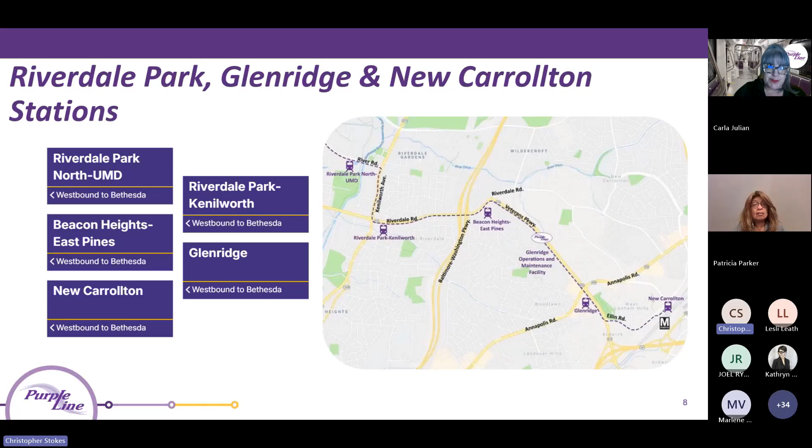And with that, I'm going to turn it over to Ray Biggs to introduce our progress video. Thank you, Carla. We're excited to share our new spring 2026 progress video with you. The Purple Line project evolved and transformed tremendously throughout 2025. And now in 2026, we're seeing Purple Line light rail vehicles in motion along the eastern side of the alignment from New Carrollton to Adelphi Road. Our latest video highlights this incredible progress. This year, we've also included stories that show how the Purple Line is connecting communities across Montgomery County, Prince George's County, and beyond. So let's go ahead and play the video.

I believe that this Purple Line will help businesses. I think that it's going to make people's trips to getting to jobs and to the University of Maryland amazing. It'll be much easier to do shopping, get to the local libraries.

And the Purple Line is going to be like a brand new baby. It's going to be so exciting. I'm thrilled, I'm thrilled, yes. Yeah, we're really looking forward to it.

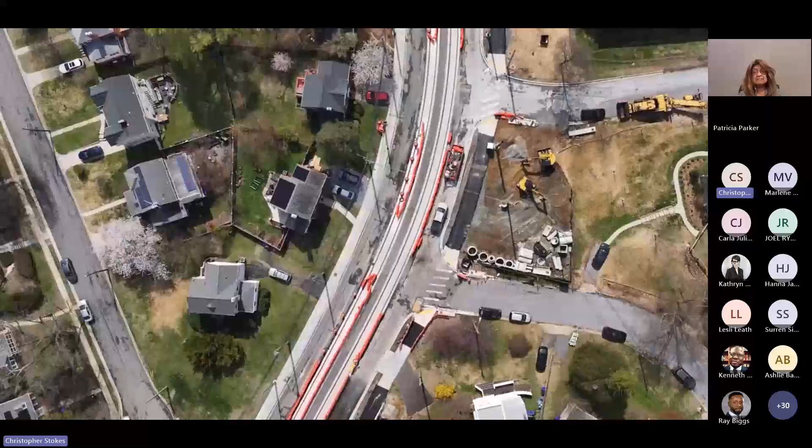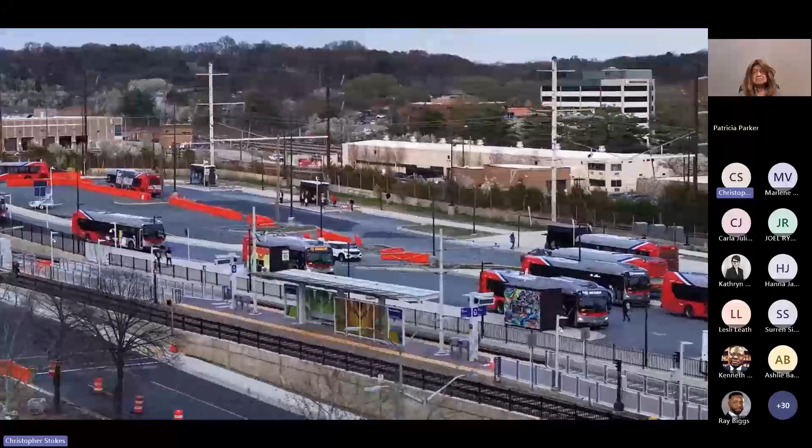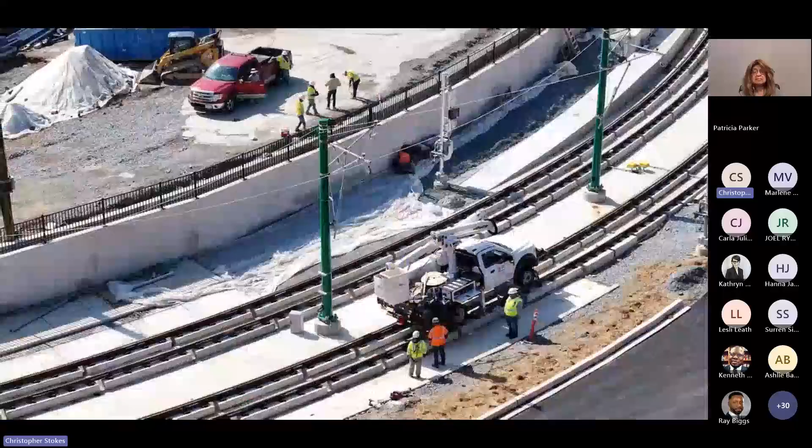Earlier this spring, Purple Line crews installed the final section of track on Wayne Avenue, an important project milestone. With the rails now in place, the project shifts focus toward the systems that power and operate the Purple Line. The systems are what make the Purple Line run, from the overhead power that energizes the trains to the communications networks that keep everything connected.

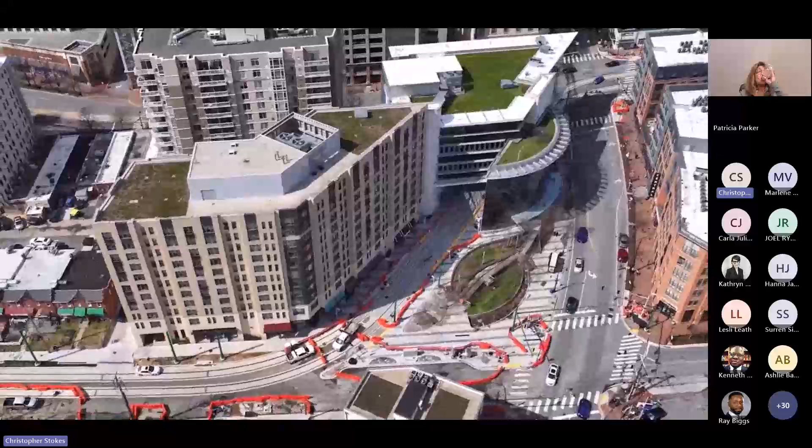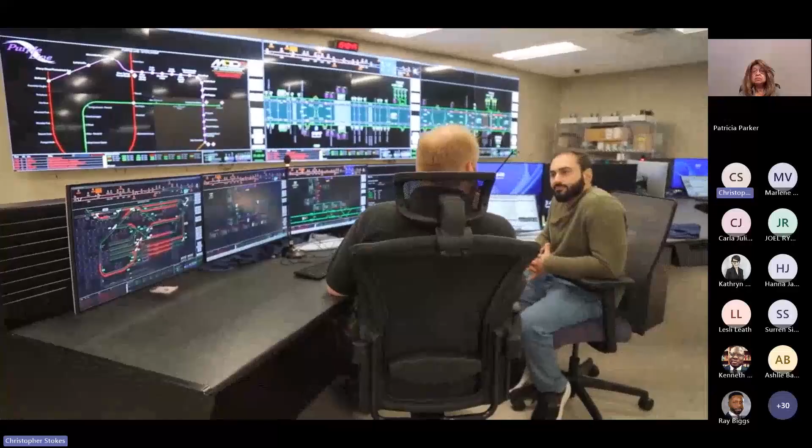This is where the railway really comes together. More than 1,000 live feed cameras, thousands of sensors, and integrated traffic control devices are being installed along the corridor. These systems communicate with stations, intersections, and pedestrian crossings to keep riders and the surrounding communities informed and safe. Once testing is complete, operators in the control center will be able to see every light rail vehicle in real time and monitor activity across the entire system.

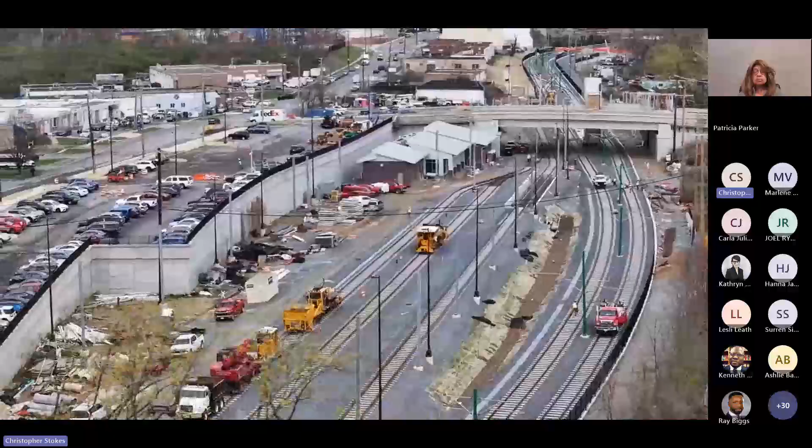Supporting those operations, the Lyttonsville Operations and Maintenance Facility is nearing completion. The facility includes additional storage tracks, maintenance areas for the light rail vehicles, and a backup control center to support trains as they move along the line.

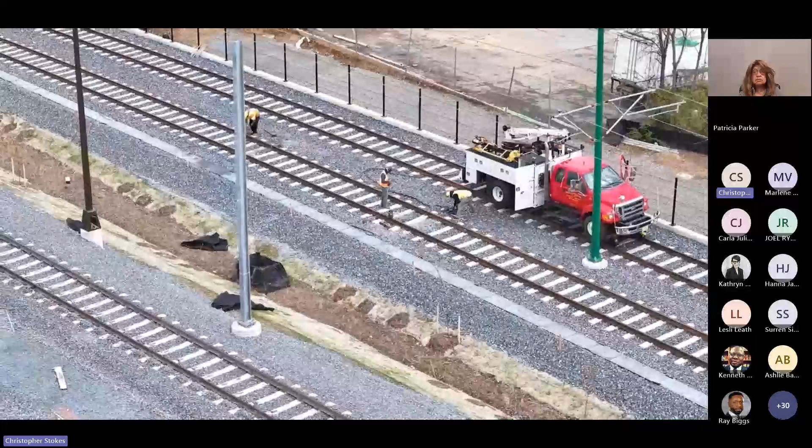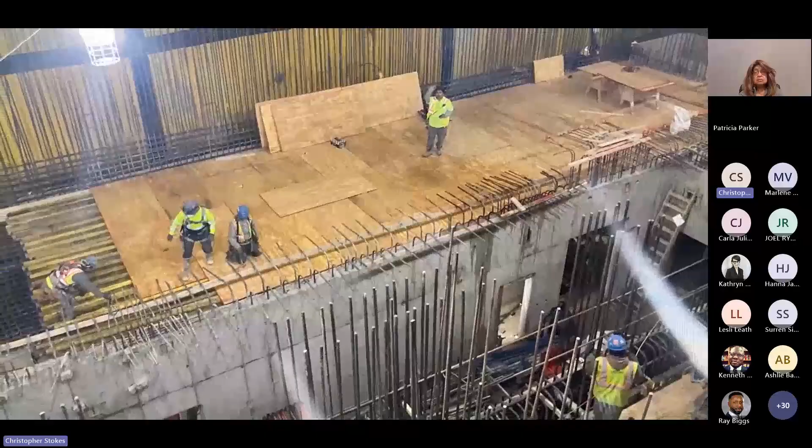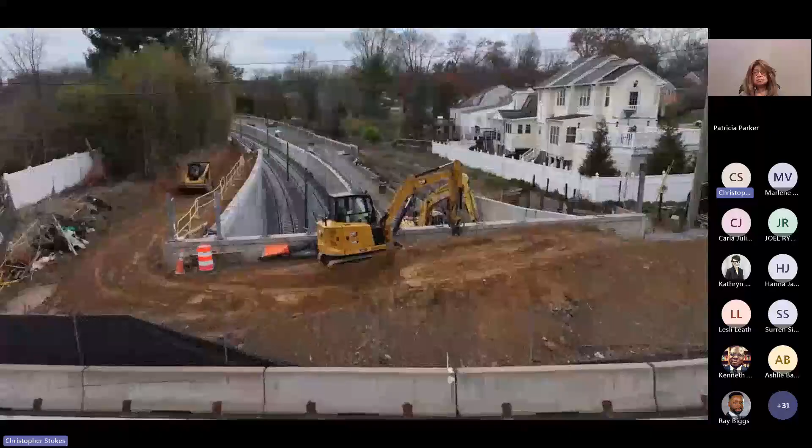In Bethesda, progress continues on the station lobby located just below ground level, and as crews place tons of concrete for the elevators in the cavern, preparations are underway for the complex connection between the Purple Line and Metro's Red Line. Work is also advancing on the Capitol Crescent Trail, where crews are constructing new retaining walls, installing drainage, and beginning paving operations between Bethesda and Silver Spring.

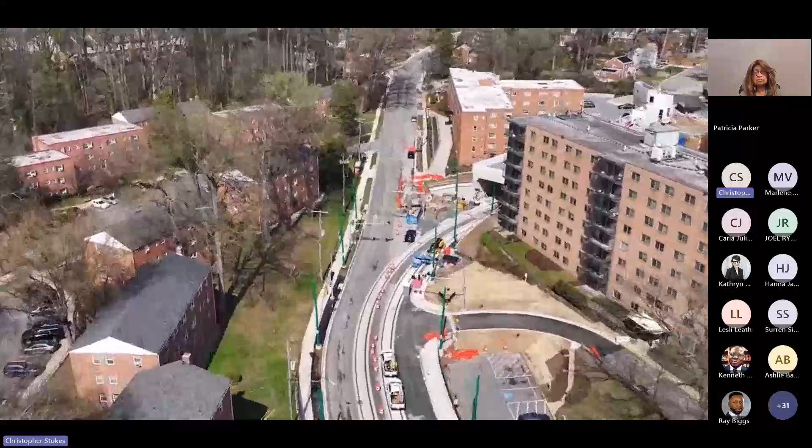Across the corridor, crews are also completing sidewalks, driveways, and other finishing touches that reconnect neighborhoods and restore the streets surrounding the new line.

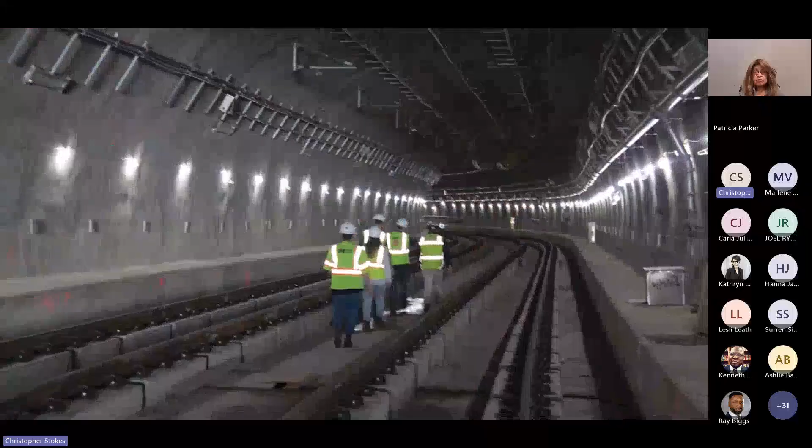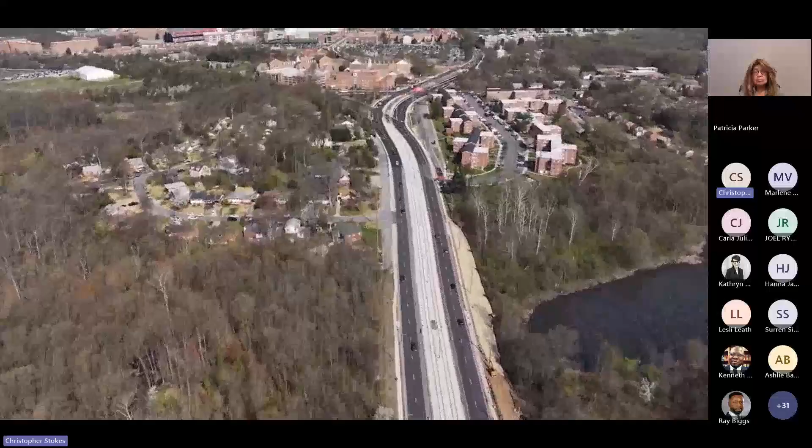Inside the Plymouth Tunnel, track installation is complete, and crews are now installing the overhead wiring that will power trains through the tunnel. With spring growth, the project's corridor will be turning green as crews plant thousands of trees and other landscaping elements along the alignment, restoring the corridor and enhancing the communities along the line.

Through the University of Maryland and Prince George's County, heavy construction is giving way to finishing crews and the installation of complex systems and utilities. The elevated station in Riverdale now has elevators and stairs in place, signaling its readiness to begin serving the public.

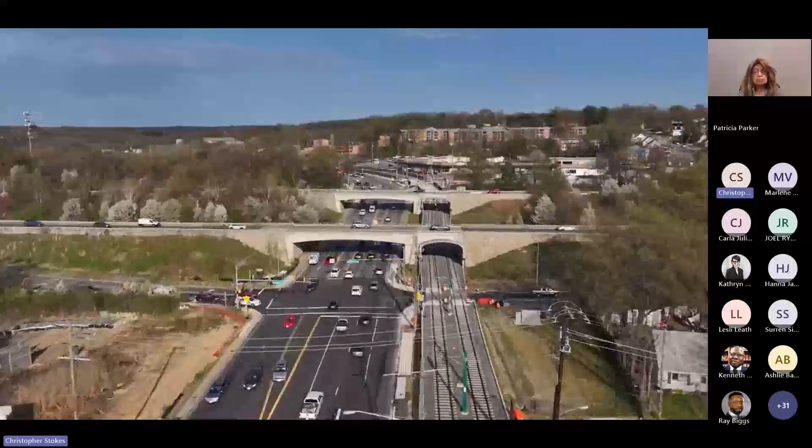At the Purple Line's eastern terminus, crews are also applying final finishes, and construction along Ellin Road is nearing completion.

Meanwhile, system testing continues along the Purple Line. Light rail vehicles have already traveled from New Carrollton to the University of Maryland campus, and testing will continue along the entire corridor in the months ahead. Testing typically takes place at night and is supported by maintenance of traffic teams and local police directing traffic to help keep everyone safe.

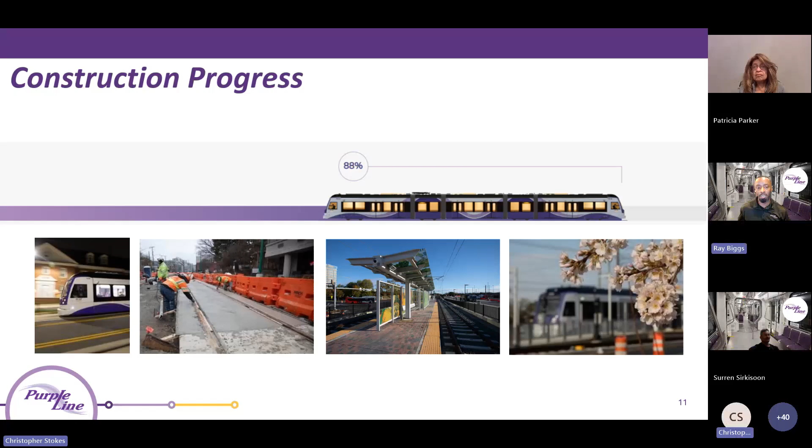Hello, everybody. I'm Surren Sirkisoon, Systems Manager for the Purple Line project, and I'm going to spend a few minutes talking about our current and upcoming test activities.

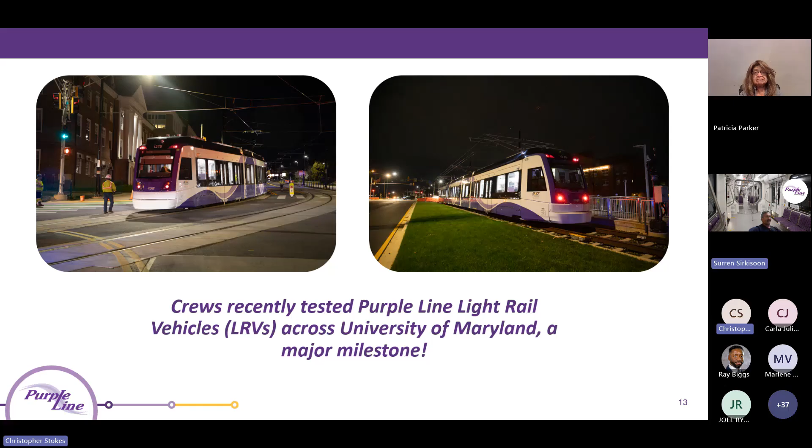As Ray mentioned, we have been testing with our LRVs from New Carrollton and now into the University of Maryland area. We're in the midst of our testing currently, and I'm sure some of you have seen our light rail vehicles moving through the area. It's a pretty exciting time for us, and we see it as a major milestone.

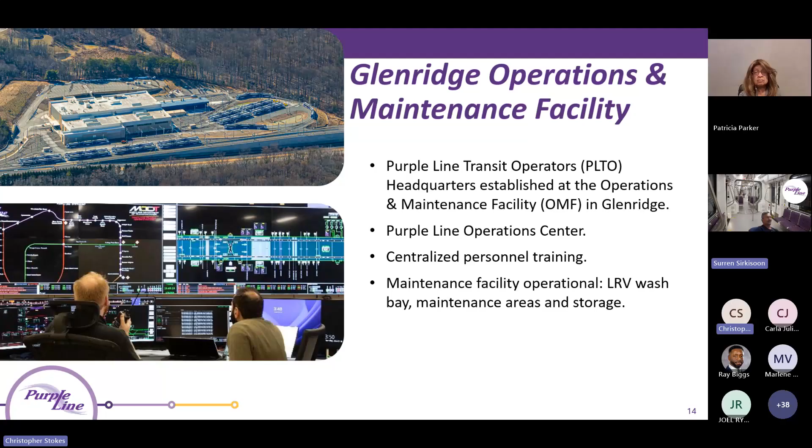We also have a backup maintenance facility in Lyttonsville, as mentioned earlier, more for light maintenance and inspection of our light rail vehicles. We also house a backup control center at the Lyttonsville facility. Much of our testing is executed from our operations control center, where we also monitor and control cameras and access control devices for security of the alignment and the facilities on the alignment.

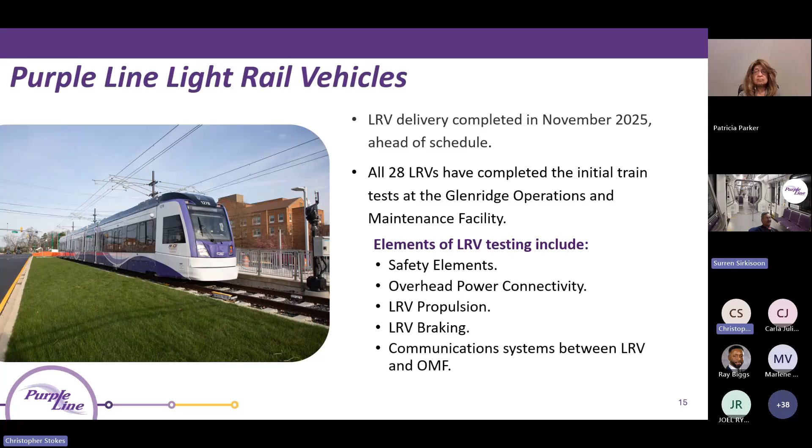As Ray mentioned, all 28 of our LRVs are now on site. They've all gone through their initial testing for a major milestone we call initial acceptance of each LRV. The safety elements have been tested, as has proper functioning with the overhead catenary system and traction power system. We've tested propulsion and braking, and all of the main safety systems—for example, the surveillance systems, the CCTV systems, and the emergency passenger intercom systems. Everything required for comfort and safety has been tested on the LRVs, along with other testing of systems on the alignment.

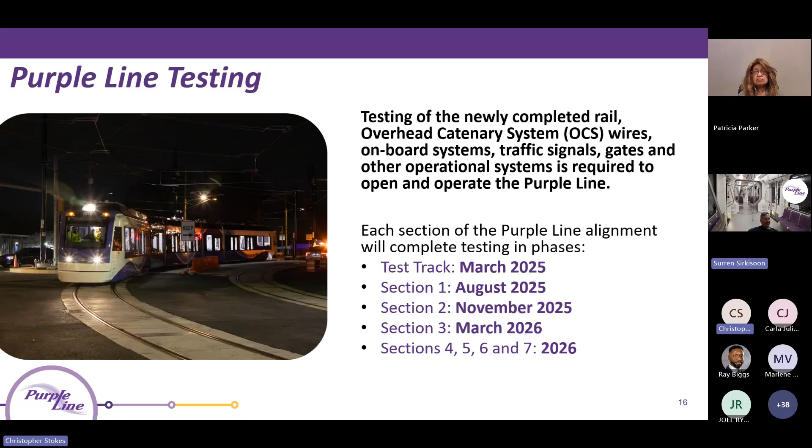Testing of the newly completed overhead catenary system has been conducted now from New Carrollton to Adelphi station through the university. We started our testing last year, dividing it into sections for efficiency and to minimize impact on the communities. As you can see on the slide, we began testing various sections starting from the test track all the way through test sections 4, 5, 6, and 7, which are expected to be completed this year.

As we move through the intersections, a major part of our test activity is planning our LRV movements through them. Until the intersections are fully tested and commissioned, all LRV movements will require maintenance of traffic—consisting of our forces, police officers, and flaggers. There may be road closings or intermittent traffic stops. For each test section, a specific MOT protocol is developed and communicated to the community, so everyone knows how our LRVs will move safely through the intersections without severely impacting vehicular traffic flow.

Our hours of testing for moving LRVs are from 9 p.m. to 5 a.m., and this will occur through the end of 2026. A word of caution: the public should always consider that sections are live. Once you see a train going through an area, consider that section live and expect to see LRVs through those areas periodically during our test phase.

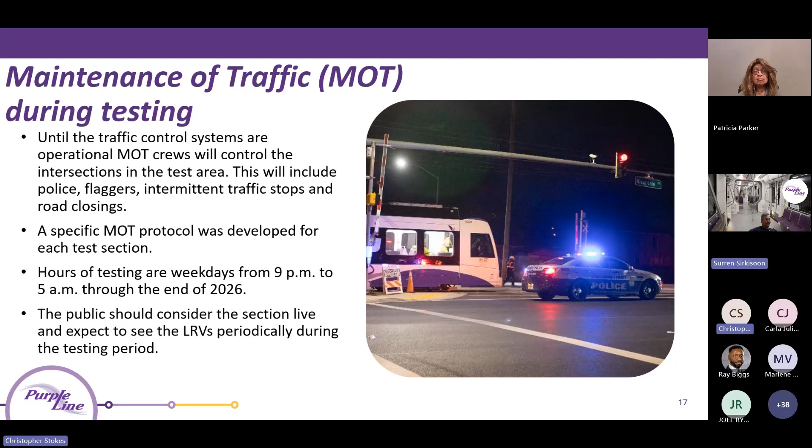Testing safety is first and foremost as we test on the alignment. During and after testing, the public should consider the tracks and especially the OCS wire - the overhead catenary wire that runs along the tracks above the trains. Consider these wires always live; they carry 1500 volts and are extremely dangerous. We encourage our community to think safety and to get used to LRV movements in the areas.

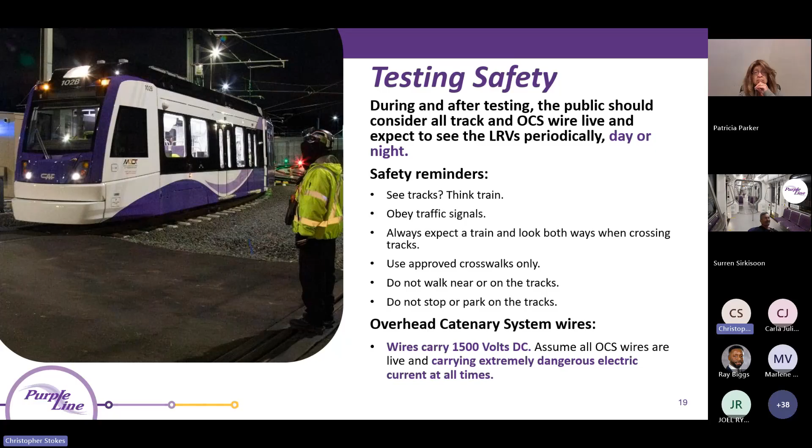Thank you, Surren. Good evening, everybody. We're going to start with the construction updates from River Road, and then we'll travel all the way to New Carrollton. On River Road, we have completed the majority of the track and track-related items like the overhead catenary system, and also completed the fence installation along the tracks. If anybody's riding in this area, you can see that. We are continuously working on completing the grading and final landscaping, along with improvements to the intersections at Hague Drive and River Tech Court. Upcoming work includes paving, striping, and final signage on River Road, expected this year.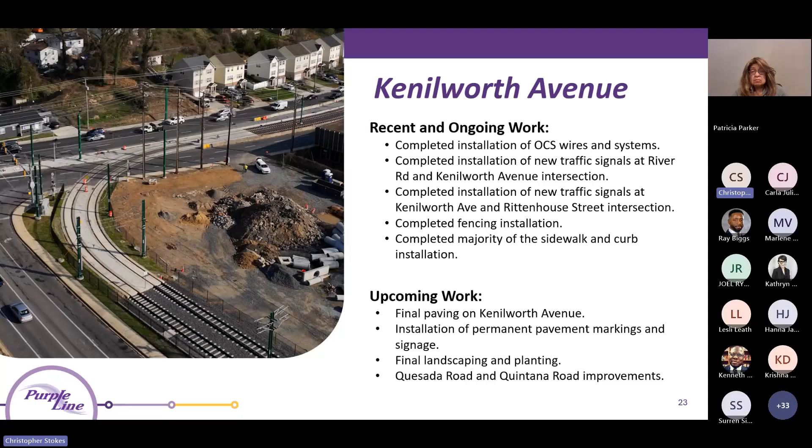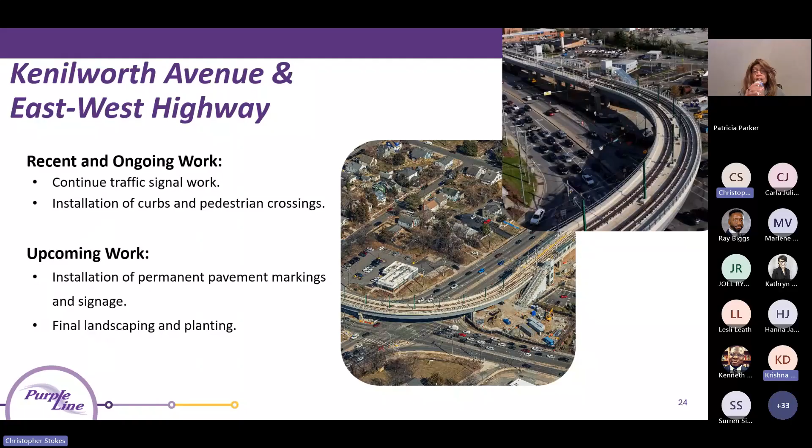At Kenilworth Avenue and East West Highway, we are continuing the new traffic signal infrastructure installation at this intersection, along with curbs and islands. Upcoming works will include final paving, pavement marking, signage, and landscaping on the corners of these intersections.

Riverdale Park Kenilworth Station - major works have been completed, along with elevator and stair access to the elevated station. We are continuing to do grading, sidewalks, and curbs underneath the station at the plaza level. We will continue that work while the final inspection of the station is upcoming soon, along with landscaping this year.

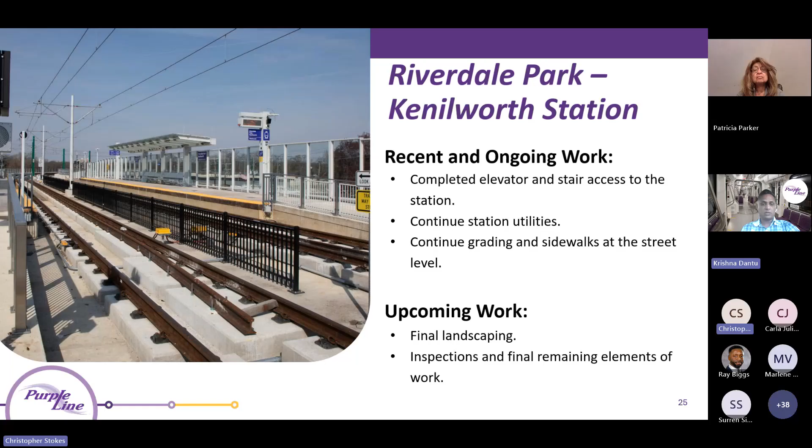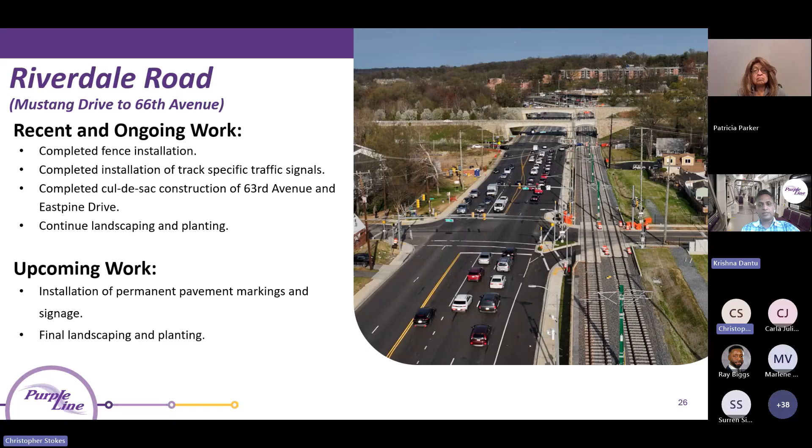Riverdale Road - we have completed the fence installation, and the asphalt work on the road in this section shown on the right. We've also completed work on the side streets in the cul-de-sac of 63rd Avenue and Eastpine Drive, and works on Patterson Avenue. There's more asphalt pavement work beyond the BW Parkway bridges, expected this year, along with final landscaping and planting that's almost beginning now.

Riverdale Road along 66th and 67th - similar to the previous section, we have most of the track and OCS wires completed. Here we also have new signals at the Riverdale Road and Veterans Parkway intersection, now operational, and most sidewalks and curbs in this area completed. We still await final paving later this year at the intersection and from the BW Parkway bridges to the Veterans Parkway and Riverdale Road intersection, along with installation of permanent signage.

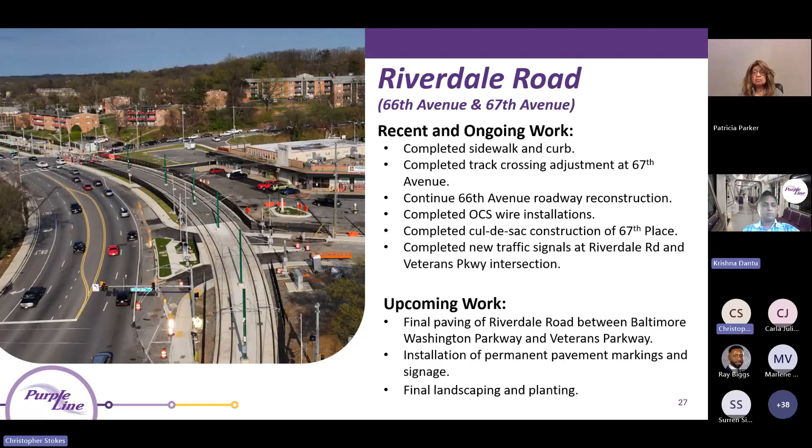Beacon Heights and East Pine Station, most of the works at the Purple Line Station here are in advanced stage. Most of the station elements have been completed, while we still are pending some landscaping works on either side of the platforms, and also the installation of art in transit here, along with inspections and systems testing at the station.

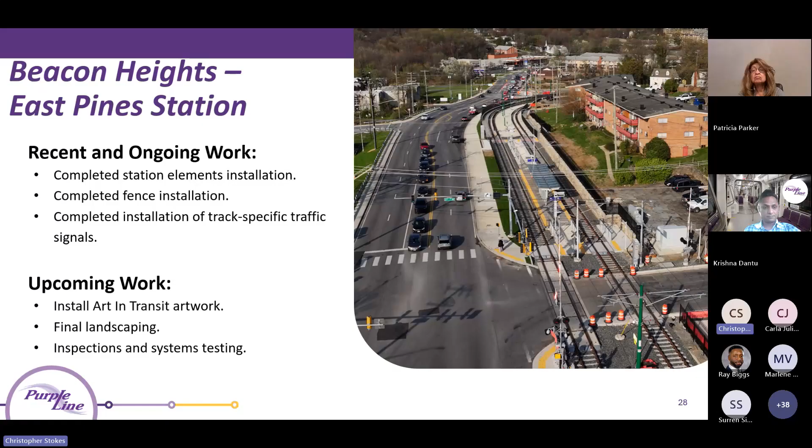This is the Beacon Heights art in transit, which are two 9-foot sculptures that will be installed between the tracks and the sidewalk. They're really colorful and sparkling, attracting the attention of passersby and the riders. The final design, though, is still in progress, so we will update the community and everybody once things are finalized.

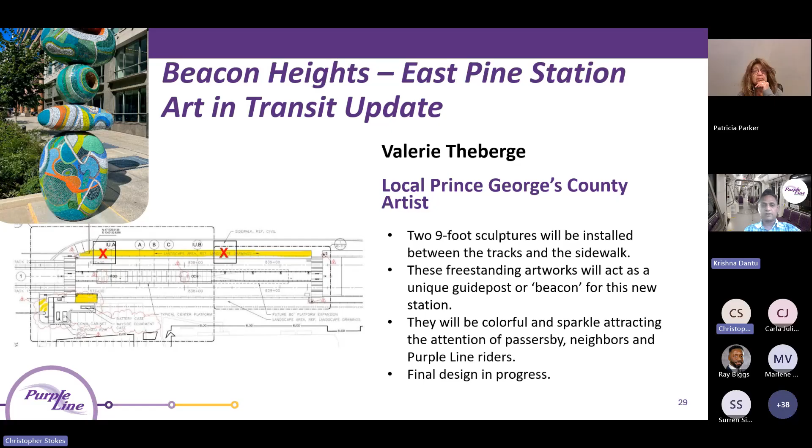Veterans Parkway, we have completed the final paving, along with the construction of the traffic signals at the maintenance facility at Glenridge. We've also completed the fence installation along Veterans Parkway, and we are continuing the landscaping and planting. One of the upcoming works, starting in the next few weeks, is a pond at the corner of Veterans Parkway and Riverdale Road. That's going to happen through the summer, and we are expecting to get that completed.

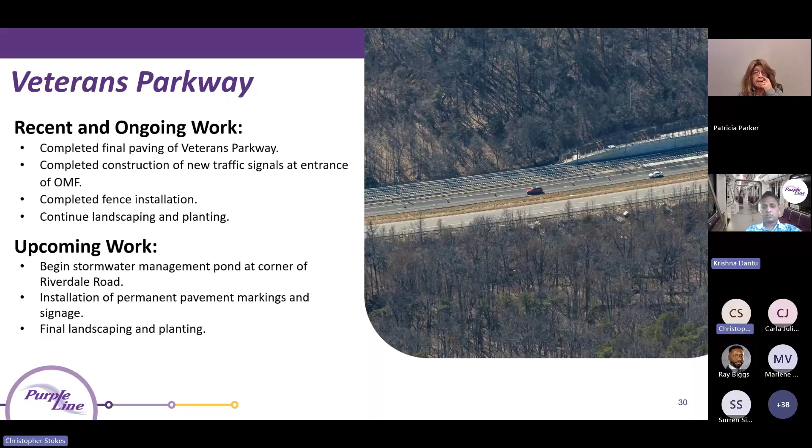And the final pavement markings and signage work. The signage work is ongoing as we speak. The final pavement markings will be completed soon, along with the final landscaping and planting of trees along Veterans Parkway.

The Glenridge facility, the main operation and maintenance facility, as Ray mentioned at the beginning, we've received all 28 light rail vehicles, and Surren mentioned the testing - these are all tested and accepted. The operator group, the Purple Line Transit operators who'll be operating the Purple Line over the next few years, are now staffed, and they're continuing and coordinating with us in terms of dynamic testing and day-to-day activities. We're working on completely transitioning the operational facility to the operational team, and we're expecting that to happen soon.

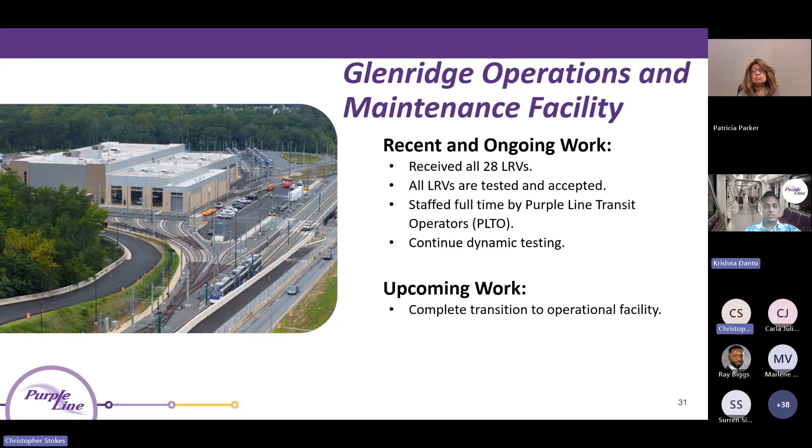Annapolis Road, we have completed the asphalt at the intersection. It was a big challenge, and our team, along with the asphalt contractors, have done a great job in minimizing the impacts to the public while doing the paving operation here. We've also completed the intersection works along with some of the systems integration of the traffic signals. We are expecting to get to the permanent pavement markings and signage, along with the landscaping, pretty soon this year.

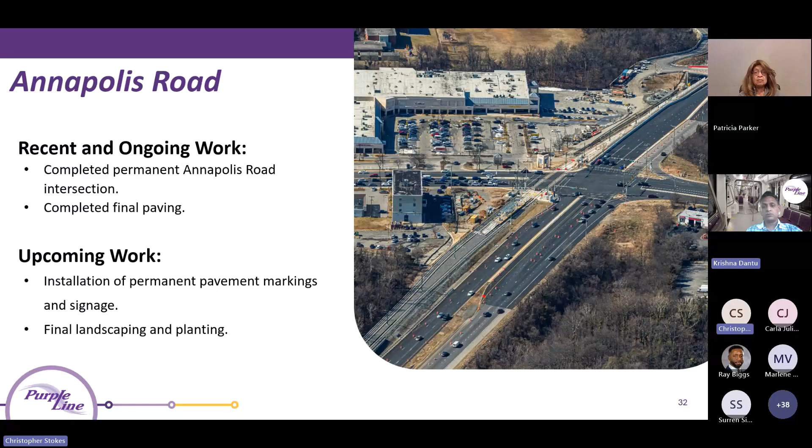The Glenridge station, like Beacon Heights, is also in a very advanced state of progress. Most of the station elements have been completed, including the canopies, signage, lighting, and benches. The landscaping and planting work is ongoing, and it's going to happen through this year. The upcoming works here will be the station access walkways on either side of the platform, and the landscaping around the station with minor curb and sidewalk works.

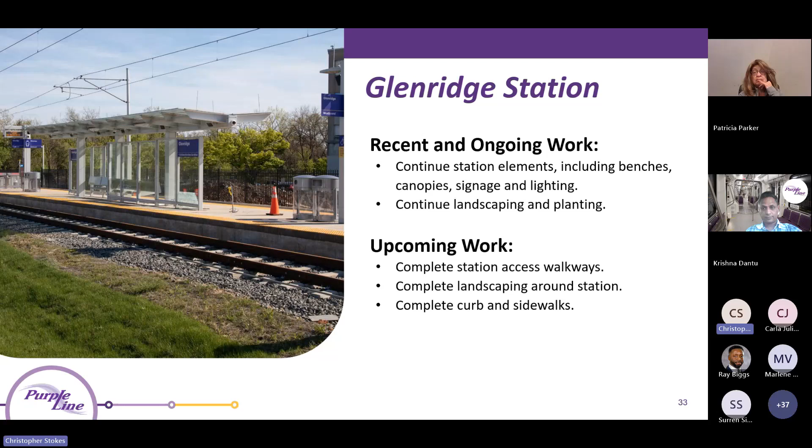Ellin Road, all the curbs and sidewalks on Ellin Road have been completed, along with the traffic signal intersection at Ellin Road and the new bus loop near the WMATA New Carrollton station. The signage installation is completed, and the final landscaping and planting is ongoing as we speak. We are also expecting the permanent pavement markings here, along with the other sections of the segment, and looking forward to opening Ellin Road from Emmerson to Harkins after the testing is completed.

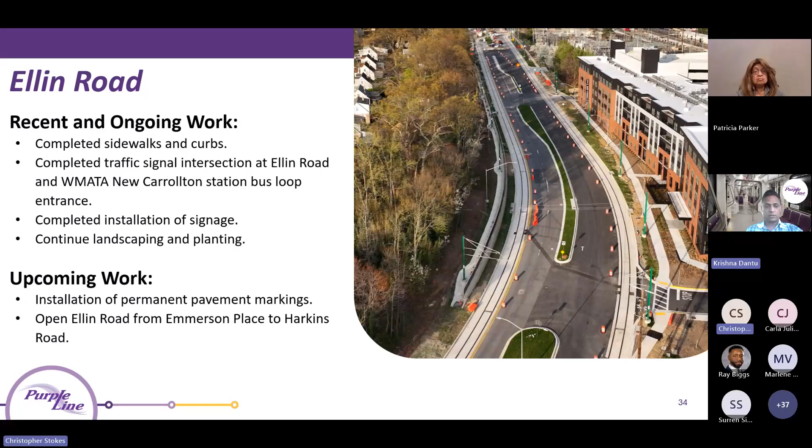The New Carrollton station - the New Carrollton WMATA station - we are now actively working on the phase where we are building the new bus loop. In terms of work progress, we've completed the storm drain and the sand filter installation. We're now working on the sidewalk and the curbs, and we'll start working on the pavement along the bus loop. We will be working with WMATA to get this bus loop accepted, and the buses will then be running in the new bus loop from where they are in the temporary bus loop, which will be the future Kiss and Ride.

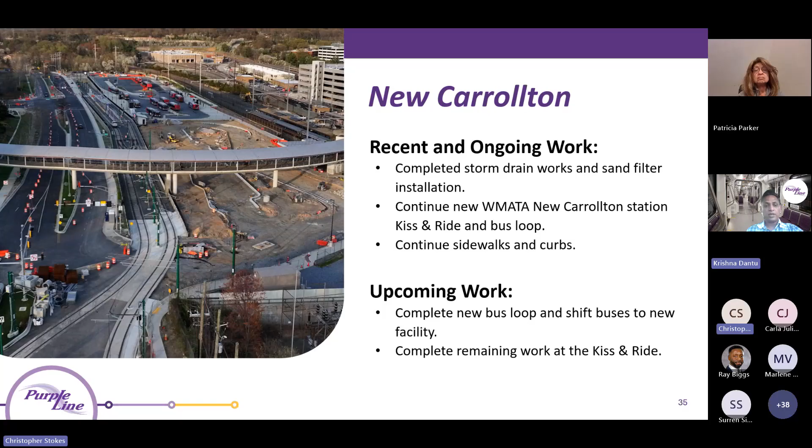The New Carrollton Purple Line station, along with other stations in the segment, we have completed major station elements like the canopies, lighting, and signage. The Art in Transit is also completed, where you can see on the picture on the right side, panels like a screen in the middle of the platform.

The upcoming works, while we are completing the testing, there are some final inspections and final elements of station related civil and systems work that will be completed soon.

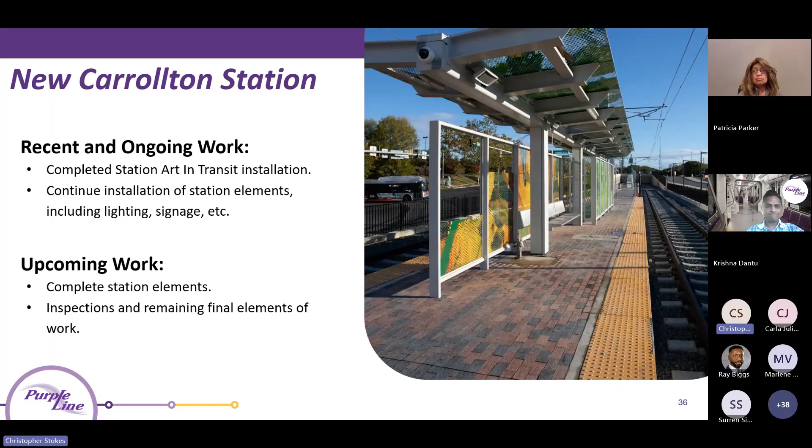Thank you, Krishna. So our Purple Line Business Relationship Manager, Leslie Leeds, works with the business engagement team along the alignment, alerting them to construction impacts and providing advanced notifications in English and Spanish. If we go to the next slide here.

So the outreach is aimed at minimizing disruption and maximizing awareness. Additionally, our team promotes business on our website, our monthly newsletter, and over all social media platforms. I invite you to visit our YouTube channel to see some of the business spotlight videos. They're very interesting to take a look at. If we go to the next slide.